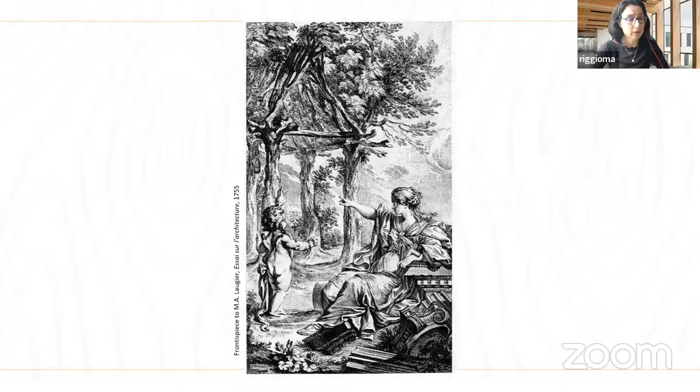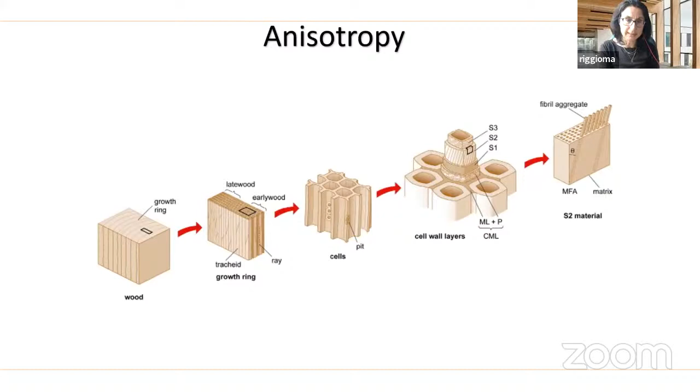Another intriguing, fascinating, and challenging aspect of wood is its relationship with water. I'm sure you have been exposed to this concept as well. We have water in the tree both within the cells as free water and within the cell walls as bound water. This bound water has a huge effect on how wood behaves, impacting its mechanical properties, all physical properties, and also its dimensions.

Wood always absorbs and desorbs moisture from the surrounding environment, and this implies changes in its dimensions. These changes are different in the transversal direction, because the cell walls swell, and this movement is propagated along the transversal direction, while it is much more stable along the grain. Keep these things in mind when I describe some of the construction systems.

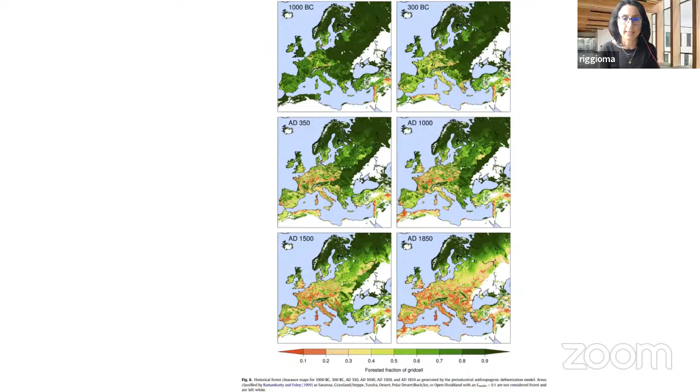First, some historical background, focusing on Western culture, though we have an incredibly rich culture of building with wood in other parts of the world too. In countries where the land was largely covered with coniferous forest, it was logical to use this plentiful material for building houses in the simplest way, with massive wood walls providing good insulation. This led to the development of log houses or blockbau houses, a technology using logs stacked in walls intersected at angles to make sturdy construction with good thermal properties.

On the other hand, in areas with a climate favoring deciduous hardwood trees such as oak, different technologies took place based on timber framing. Here, elements are connected to make a frame, and other non-structural materials are used for the infill, closing these panels for the building envelope.

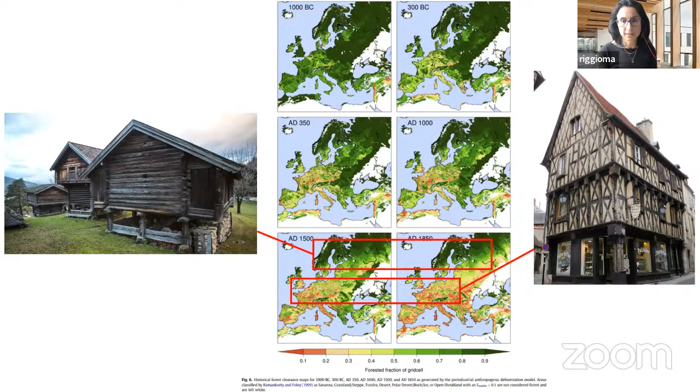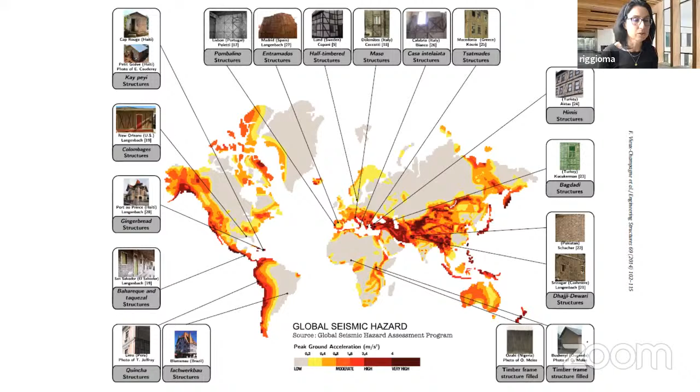This technology has different names in different parts of the world, but you can find it in many areas. What's interesting is mapping the evolution of timber framing systems in earthquake-prone areas. Both Peru and the West Coast of the US share the luck of being in the so-called Ring of Fire. I'm sure you know that a technique based on timber framing and other light materials was also common in the past in Peru, the so-called quincha system.

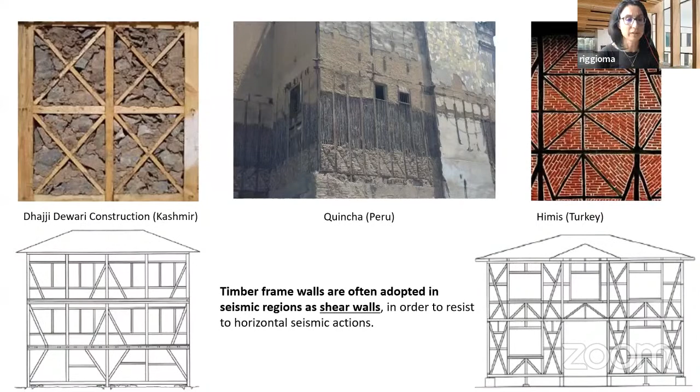Here are some examples of heavy timber frames in the past, dating back to the Opus Craticium from Roman times. One characteristic of these systems is the presence of cross bracing to create a stiffer system that can resist shear forces, basically horizontal forces. This type of construction, the so-called heavy timber frame, is also a common construction method today, particularly for commercial and industrial buildings in the US.

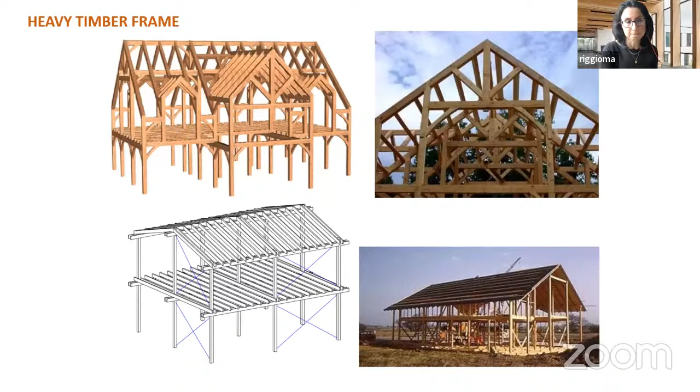The heavy timber system is often called post and beam. It uses large timbers for vertical columns and horizontal beams, connected nowadays with either wooden joinery or metal connectors. In the past, carpenters relied heavily on notched connections. This type of connection system transfers loads through friction and bearing. Keeping in mind the structure of wood, which is very strong along the grain, the load is transferred through this connection by compression, compressing the fibers, which allows for a very important behavior in case of an earthquake: dissipating energy. So basically, we have a ductile behavior in the connection systems.

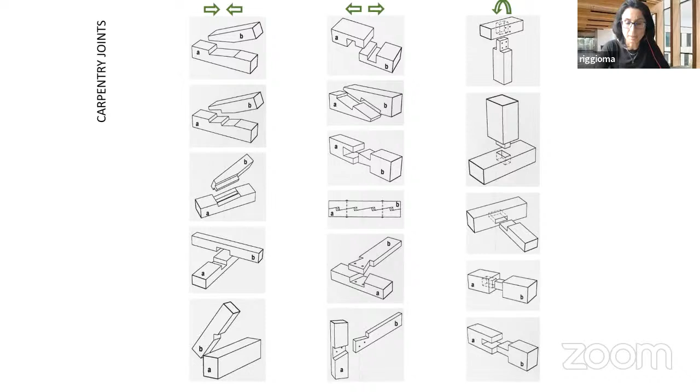Now, in case of an earthquake, we also have to make sure that when we have the reversal load, these systems do not disassemble. So we have to secure the carpentry joint somehow. But this system required a lot of skills. These were kind of unique buildings.

So quickly there was a development in North America, especially after the Industrial Revolution, with more efficient cutting of wood into timber members of a smaller cross section, which increased the efficiency and economy of building in timber. Also influential was the invention of the wire cut nail, which greatly increased the availability of nails at lower prices, and which basically replaced the blacksmith and forged iron nails.

So in the early mid 1800s, we have the development of the balloon frame, which originated in the United States around the Chicago area. And this is the St. Mary Church in Chicago, known as the first balloon frame building.

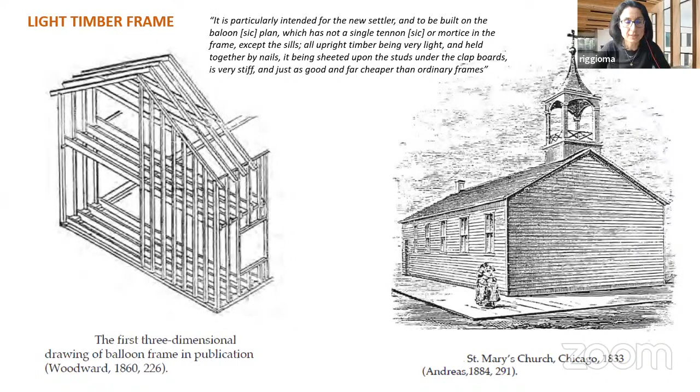So the characteristic of the balloon frame is the use of full height studs. So basically these vertical elements go for the entire height of a building, and then the floor joists are supported on a ledger. So basically, there is a continuity of the vertical system, and the wall extends two or more stories, and the floor is sunk on a ledger connected to the wall.

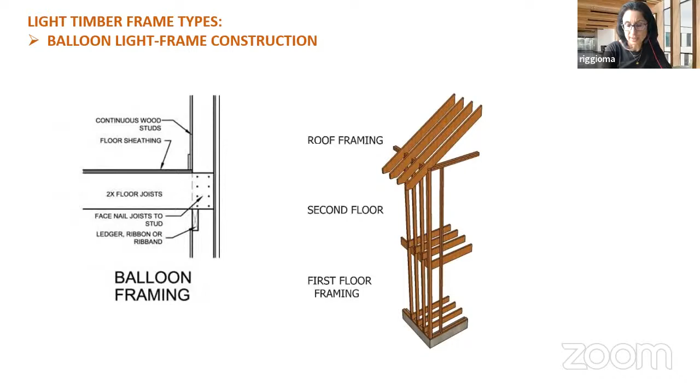This system is still used in the US, especially in industrial and retail applications, but it has its advantages and disadvantages. One of the advantages is that we have this continuity of the load-bearing vertical system. So if you, again, keep in mind the anisotropy of wood, we have a continuous load path along the fiber of the material where it is stronger. And also we have less impact in terms of dimensional changes due to moisture changes. And you will understand this better when you compare this system with the platform framing.

By contrast, the platform frame positions the floor platform between the first and the second floor vertical studs. So you see, we have the joists that are supported by the stud from the lower floor, and then the stud on the upper floor stands on the floor joist. So we have vertically oriented fibers, then horizontally oriented fibers, and then again vertical.

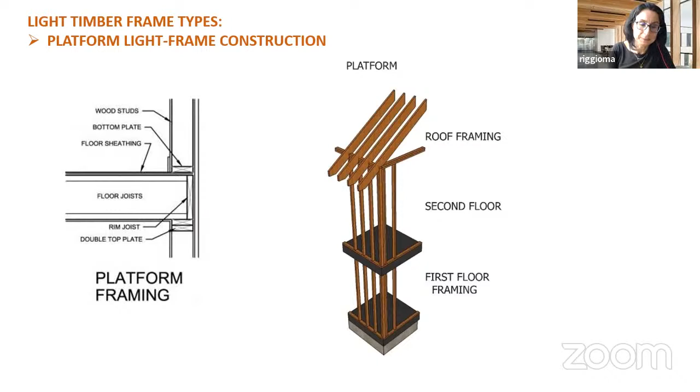So this area of the floor joist may deform in case of high loads, because we have crushing of the fibers. We may have high compression loads if we have multi-story buildings, and also swelling, so these dimension variations due to moisture absorption are higher in the transversal direction. This may also have an impact. These are one or two of the factors that may limit the number of stories in a light frame system. It's not the only factor. In fact, fire is also a huge limiting factor, but I'm not going to talk about this. I just want to show you all the variations.

So an approach to kind of combine the advantage of the platform frame, which is easy and fast erection. In fact, it's the most common way of building in the US for residential buildings nowadays. So a possibility is to still have studs on top of each other, so that we have this continuity of the load path along the fibers, and then have a top flange hanger that supports the joists of the floors.

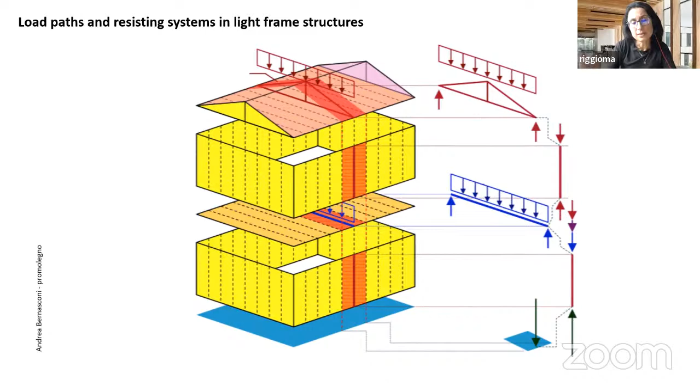So talking about load paths, we have the vertical loads that are transferred from the roof to the walls through the studs, and then in the platform system we have the joists in the floors that also transfer the floor loads to the studs of the wall below. So this is the gravity load path.

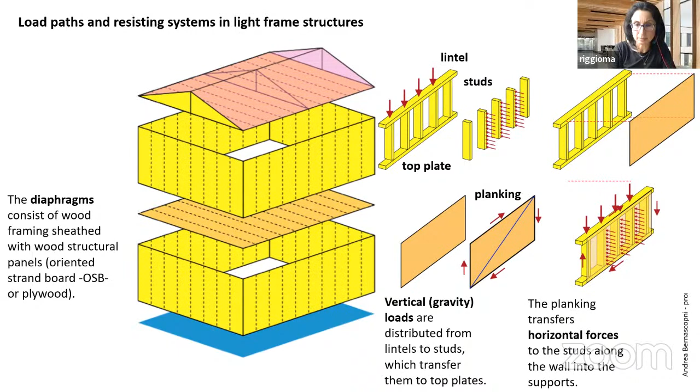But then, of course, we also have the horizontal forces. And the horizontal forces are transferred to the studs through planking, through planar or panelized systems. The planking transfers the horizontal forces along the wall into the supports, and the stud frame prevents the planking from deforming, from buckling. So this means that we have not just linear members in a light timber frame, but also panelized systems.

And actually, we have not just what we call here dimensional lumber, which is based on standardized dimensions of timber that is cut in so-called 2 by 4, 2 by 6 inches. But we have also different types of engineered wood products, which, especially for higher loads, allow us to optimize the material, to use less material, and have stronger elements. One of these common systems used in light timber frame, for instance, for highly loaded floors, are the I-joists.

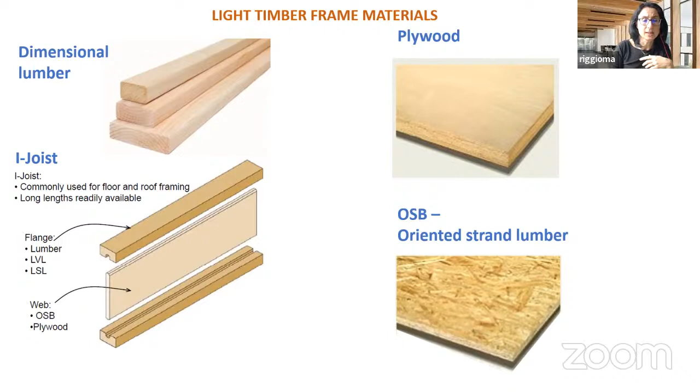In which we have the flanges that can be either solid wood or different types of engineered wood products, and then the webs in which we have a type of engineered wood panels. In the past, they were made of plywood. Nowadays, they're typically made with a type of strand lumber composite. And we have here these two materials that are also used for the planking. But I'm sure at this point you have some familiarity with these different types of products.

In this diagram, I want to show you how you can classify them. So basically, the basic concept of the different types of engineered wood products is that they are made by laminating wood. Wood that can be cut, that can be reduced into smaller elements, into boards or veneers or strands. And so depending on the width of this elemental component and the length of the fiber, we may have different types of engineered wood products with different structural capacities.

I've seen one of the questions regarding sustainability, why wood is more sustainable. I'd like to respond to this later on, but keep in mind this diagram. We have said that wood is strong in one direction, the direction of the fiber. So depending on how we layer these fibers in a wood composite, we will have a material that is stronger in one direction, that may have similar strength and stiffness in two directions if we cross-layer the fibers, or that has more of a plate behavior, maybe not so strong, but somewhat equivalent in all directions if we orient these fibers more randomly.

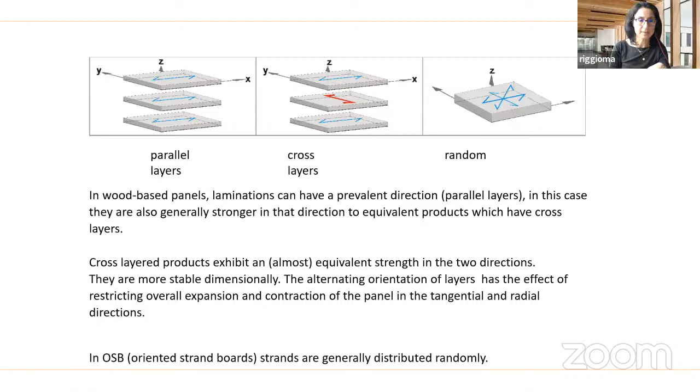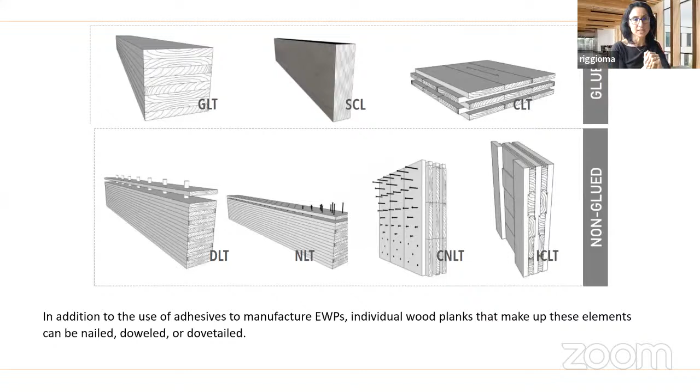And these laminations may be connected in different ways. The most common way is through glue, with adhesives, but we also have laminations that are connected with metal nails, with wooden dowels, or other types of systems. There are multiple advantages of using engineered wood products. One is that wood is a natural material, so it's variable, it's unpredictable. We may have different heterogeneities that affect its mechanical properties. So if we reduce the size of the material and spread these heterogeneities in the lamination, we have a much more uniform, more predictable material, something that engineers like more.

And then we can overcome the limitation of wood as it comes from the tree, with dimensions that are linked to the original dimension of the tree trunk. We can have longer elements by connecting the lamellas through so-called finger joints. We can stack these lamellas to make bigger cross-sections. We can cross-layer them so that we have more dimensional stability, because, as I said, there is an anisotropic behavior in the way wood swells and shrinks. And we can even shape it, like we can have curved elements. We can achieve a lot of new architectural shapes and forms, thanks to the versatility of these materials.

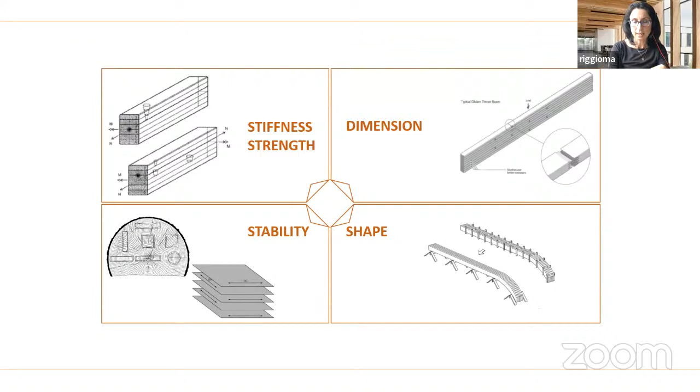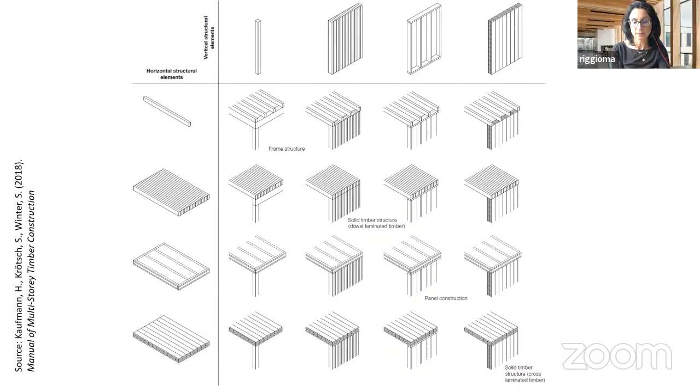And we have, at this point, a large portfolio of timber members and timber systems that we can use, both panelized and linear. We can combine them in horizontal systems, in floors, and we can use them in walls, and we can have a combination of linear and panelized systems of different types for walls and floors. So with the development of so-called mass timber buildings that use these engineered wood panels such as cross-laminated timber, as you have seen in the previous presentation, the first developments used these panels both for floors and for walls, both as a gravity load-bearing system and as a lateral force resisting system.

Now you can see some of the potential limitations of this system. Basically, you have to have a continuous load path, and therefore you have to have basically the same layout on all the floors. There are some ways to overcome this challenge, but these are still potential limitations. Another limitation is that you have to have enough material, also on the external walls, to have enough strength in the external load-bearing walls. Therefore, you don't have so much freedom, let's say, in how you place the window glazing and openings on the facade.

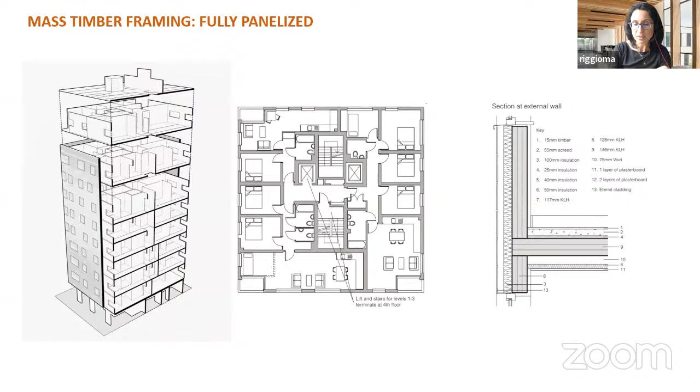There are also lots of advantages, of course, and this building, which was the first multi-story building made with CLT, was built at an incredibly high speed in a densely built and populated area in London with no disturbance, so in a very fast and efficient way. This system is also very interesting in seismic areas because it basically works as a box. So it's very rigid, very stiff, and both the walls and the floors can participate in transferring the horizontal forces.

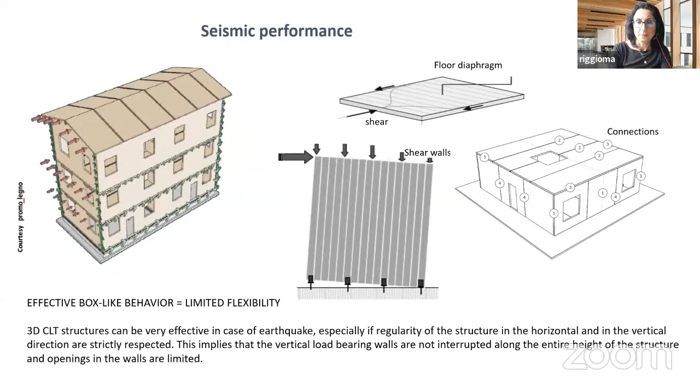But nowadays we see more and more the use of a combination of mass timber panels with post and beam systems. Post and beams that can be made with glue laminated timber or other types of linear engineered wood products, and panel floors that can be CLT, dowel laminated timber, or other technologies, mass ply panels, which have been developed here

in Oregon. So really the tendency here is to have hybrid systems in which we have a mix of wood with other materials, or different engineered wood products used for different structural systems. And I would say this is, in my opinion, the future. We build with wood, taking advantage of all the properties, or the qualities, that different materials can offer.

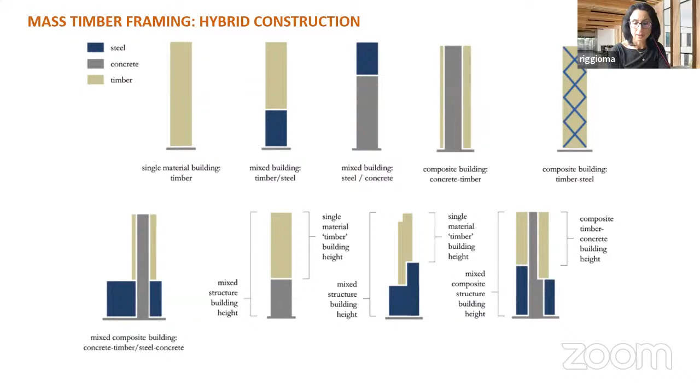And these are some examples of hybrid mass timber buildings. Brock Commons is an 18-story student residence at the University of British Columbia in Canada. At the time it was built, it was the tallest mass timber structure in the world. And you see that basically there are two main structural systems: a concrete podium and then two reinforced concrete cores where all the vertical distribution elements are located, so elevators and stairs.

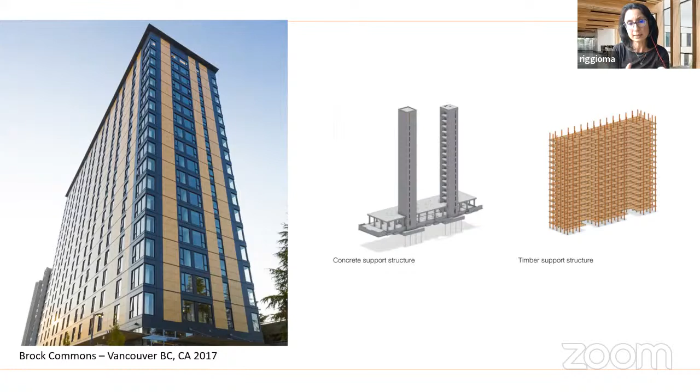And then we have the timber support structure with post and beam made with glulam and other types of engineered wood products in the lowest part where they are most loaded, so-called parallel strand lumber, and then CLT floors, cross-laminated timber for the floors.

And this is the gold building, one of the new signature mass timber buildings in the Adidas Portland campus. And again, it utilized a hybrid structural system with precast concrete columns and girders and glulam beams and cross-laminated panels for the floors.

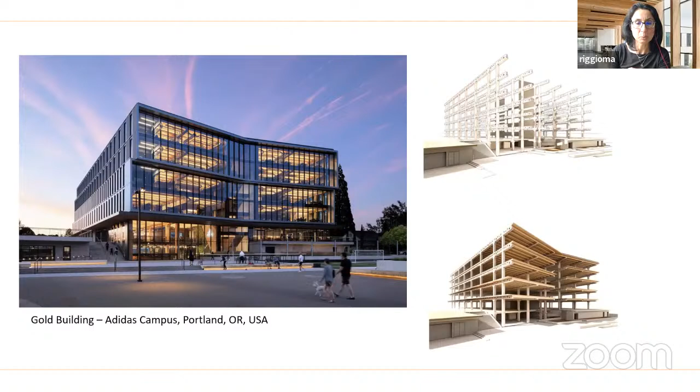So this is another picture of the Adidas building, and you may notice another interesting aspect of using this system, which is prefabrication. I'm sure my colleague Michael will talk more about this aspect after my presentation, but this is a huge advantage of building with wood and also in hybrid systems, the possibility to have a fast erection and reduced or no construction waste, high precision, minimum tolerances, and so on and so forth.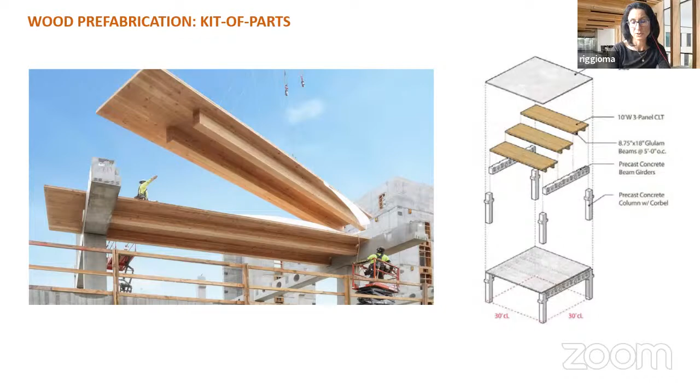So in the wood construction industry, there is an increasing interest in developing kit of parts. So basically developing construction systems that are based on the use of a few standardized elements that are used throughout the building and maybe reused in different combinations in other projects.

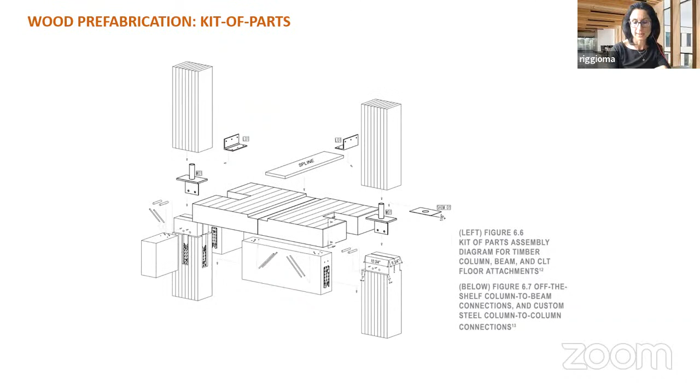So while traditional light wood framing is, I would say, a pretty much low technology construction system with all the studs and plates that are erected on site, there are ways to expedite the construction or even push the construction to the plant, and so basically have an off-site construction of the wall panels or of the walls and the floors or of the whole system.

Wood by itself allows for a certain level of prefabrication, especially when we nowadays build with heavy timber framing or mass timber construction. And we can have different ranges of prefabrication from linear, panelized, or volumetric. So in linear prefabrication, for instance, we may have connections already incorporated in the elements. In the panelized, we may have different levels of systems integration, including the envelope, for instance. And then in the volumetric, we can build from room modules to basically whole houses.

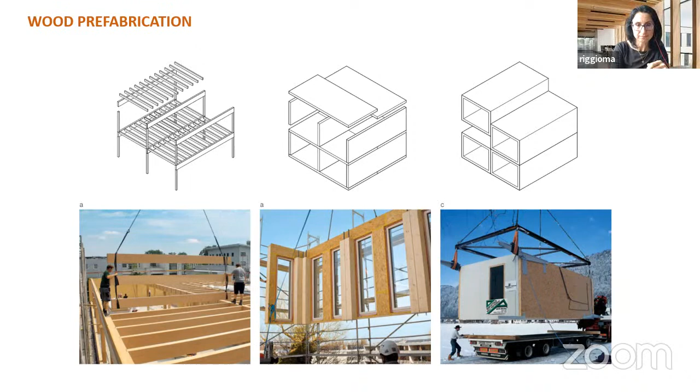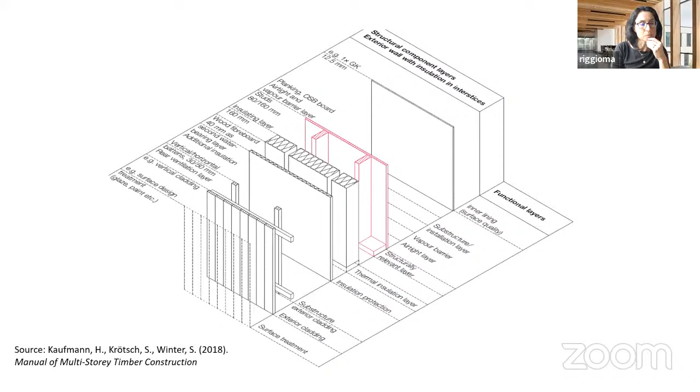These are examples of integration of the building envelope control layers in a light frame wall. So you see that all the functions of the building enclosure are made through a layered system in which we have the studs and the sheathing that plays basically the structural role. The sheathing can also have a role as an airtight layer to avoid airflows. And then we have the thermal insulation layer between the studs, protection of the insulation layer, and then a rain screen.

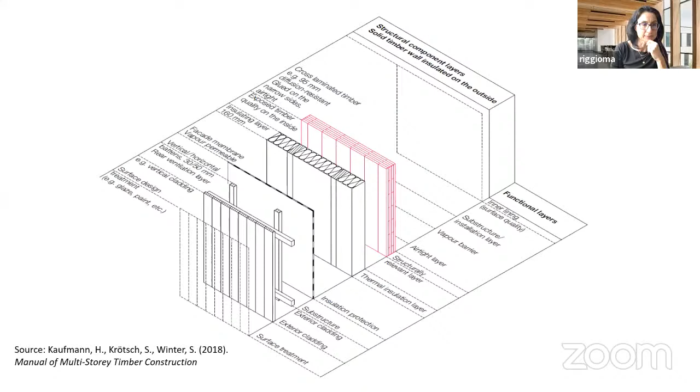In a mass timber external wall, depending on the technology of the mass timber panel, this may have different roles, including a certain level of air barrier, and also participate in the thermal envelope, because of course wood is a good thermal insulator. So we can reduce the thickness of the thermal insulation thanks to the use of mass timber panels. And in some cases, there are examples of integration of these systems of the building enclosure in prefabricated systems.

This is an example of a project that was built in Austria in the Alps in 2009, which uses modular CLT to quickly assemble on site rooms for the hotel. So this is in the Alps with heavy snow loads and early snowfalls. So there is a very limited time span where it's possible to build. And therefore, they wanted to expedite the process. They built all the modules in the plant, delivered and stacked them quickly.

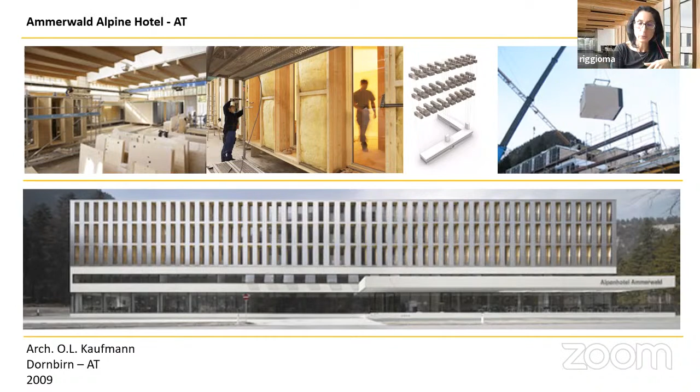And so you see that this type of concept can be very, very appropriate for buildings where we have a repetition of the same type of spatial layout. That can be hotels, dormitories, student residences, and so on and so forth.

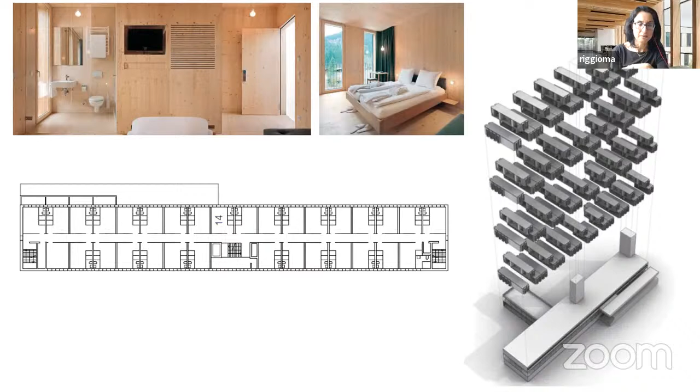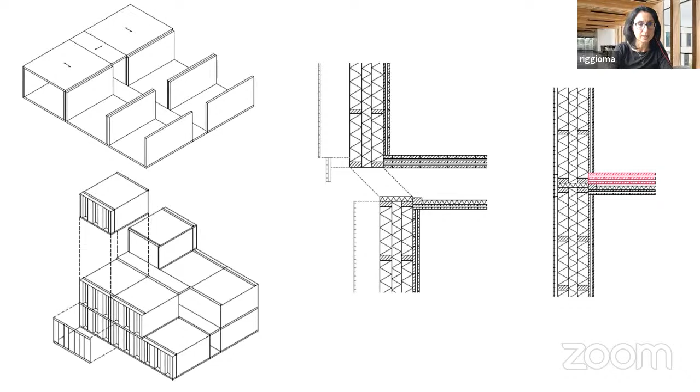You see here the two modules that are stacked on top of each other. In this case, they are almost three-dimensional. One side was open to then attach the facade that was also prefabricated, but was a separate system. And you have the double layers of CLTs.

The double layers of CLTs also improve the acoustic insulation between floors. So what we see is really a transition from craftsmanship, in the old-fashioned heavy timber framing, to mass production with the evolution of the light framing system.

Framing systems evolved to mass customization. Nowadays we can build with wood in a very efficient way, but also have unique projects to a certain extent. So we have almost all the time unique projects, and we are also now trying to investigate how we can have some form of standardization within this mass customization.

Connections play an important role nowadays also, not only on the structural behavior of these systems, but also in the expressive, architectural expression of these structures.

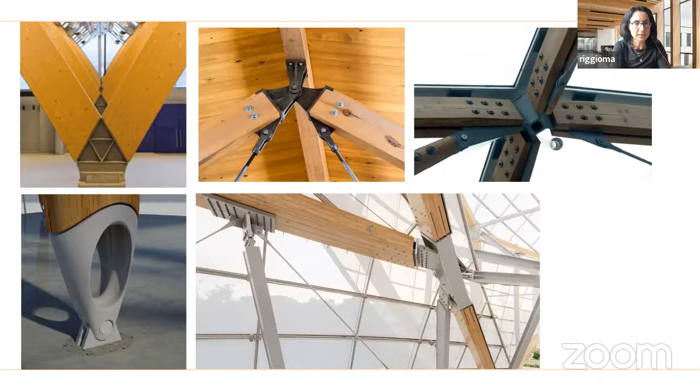Nowadays, with the development of digital fabrication, the use of computer controlled, numerically controlled machines, we can carve wood to create notch connections with a complexity that is even bigger than what was possible in the past with traditional heavy timber framing.

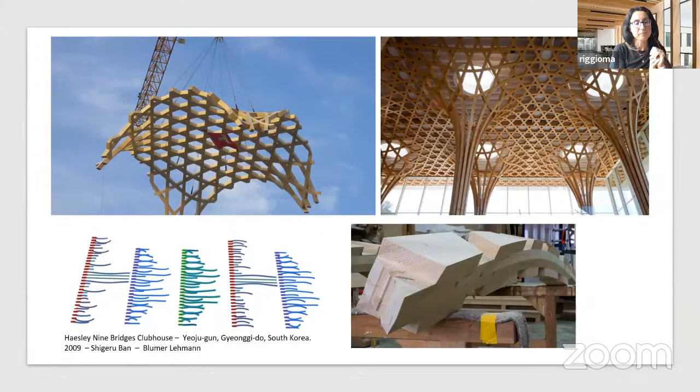So we can shape wood, we can bend it, we can curve it, we can create curved shapes, and we can notch them with CNC machines. And basically, we can have unique pieces, as in this beautiful grid shell by Shigeru Ban, still in a very efficient way of fabricating.

So I think wood is really, again, a fascinating, complex material, but really brings a lot of innovation and a lot of opportunities in terms of creativeness. And of course, we believe it will also help us create a more sustainable built environment.

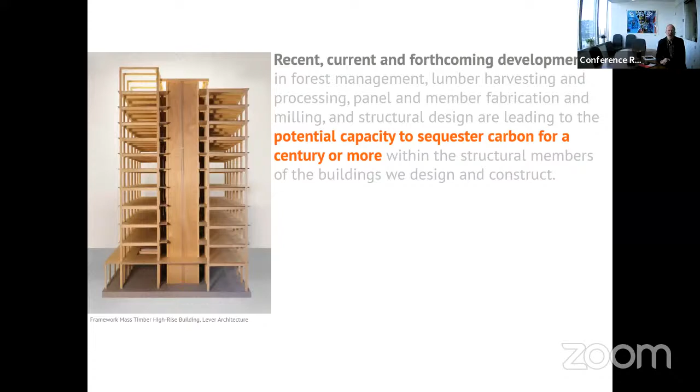That carbon held there will allow us the time necessary to develop different transportation systems and other things, energy production and such. What's intriguing is that while we're looking for these other solutions for transportation and energy production and manufacturing processes that use less carbon, we have this method that's working very well to immediately begin sequestering carbon that's been taken up over the past 30 to 40 years and continues to be absorbed.

So the thing that will be important in order for mass timber to be utilized broadly would be for the systems we're talking about to be widely accepted. And clearly the most important factor there would be to convince code authorities and authorities having jurisdiction over standards and requirements that these systems are safe, that they're appropriate, that they withstand fire, withstand earthquakes.

So one of the primary things I'll be addressing will be the prevalence of standards and requirements for the materials, the glues, the species of wood, etc.

The projects we've already been utilizing mass timber on are broad. As I mentioned, we're not only working on many different types of projects across various structural systems, we've utilized mass timber in over 80 projects we've been involved with so far.

And these are for all types of buildings - all the ones shown here use mass timber. In some cases, it's quite visible coming outside the building envelope and supporting the structure. In most cases, however, the structure is within the building envelope and protected from the weather.

This is clearly a concern in the Pacific Northwest because it's quite wet here a lot of the year. But even in South Florida where we work, we obviously have a lot of moisture as well as heat and termites and other insects. So keeping the wood inside the building envelope is the primary strategy to preserve it.

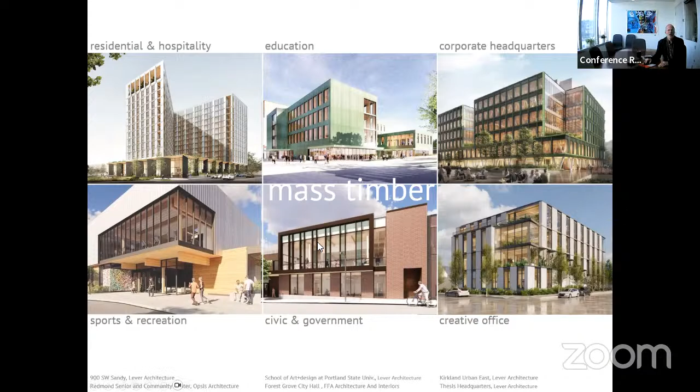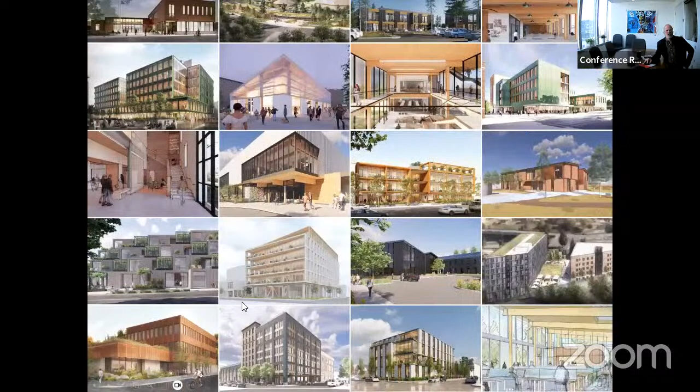So these projects cover all aspects of construction and project types that we've been working on.

The overview I'm going to give you of mass timber is going to talk about the types of mass timber panels, the standards we use to regulate those, the various species and grades and layups we use, the various appearance classifications we call for, fabrication and tolerance requirements. We'll speak about adhesives, fasteners, and connectors. We'll talk about delegated design and what that means. We'll speak about the coordination and shop drawing process between bidders and contractors and the architect. We'll speak about method statements, sealers and finishes to protect the wood, and about fire-rated connections.

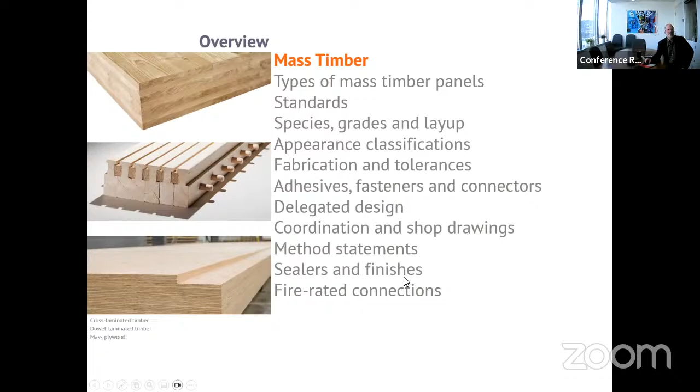First of all, I want to explore the types of mass timber. We have cross-laminated timber, dowel laminated, nail laminated, glued laminated, and structural composite, sometimes referred to as mass plywood.

The standards we see are broad ones that cover mass timber in general, as well as very focused standards for everything from adhesive to fasteners and grades of wood.

The use of this material has increased in the North American market since about 2008-2009, as we saw projects such as the one in Vancouver and others set the stage for this development. Since that time, we've had multiple generations of documents that support that.

One of the primary ones is the ANSI 117, updated every 2 to 3 years, the most recent being 2020. We also have a mass timber design manual produced by the Wood Products Council that is more user-friendly and a good introduction to the standards. There's also the National Design Specifications for the United States by the American Wood Council, and a similar parallel document in Canada, the CSA O86, which covers engineering design in wood. I can make all of these available in a zip file with as many as I was able to grab free online.

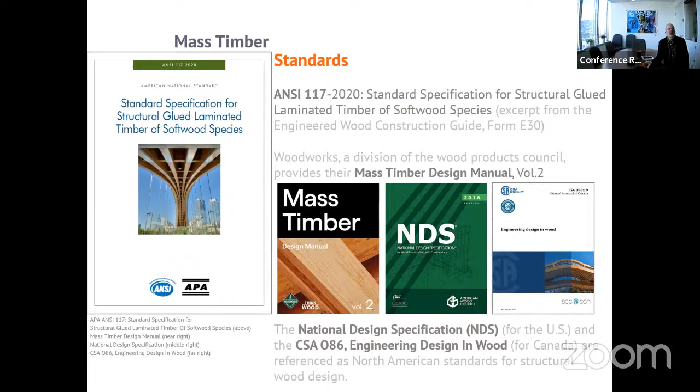Within the mass timber types, the first one I talked about was cross-laminated timber. This is a product that initiated its existence in northern Italy and southern Austria, laying up approximately 50 millimeter by 150 millimeter pieces of wood into alternating direction lamellas.

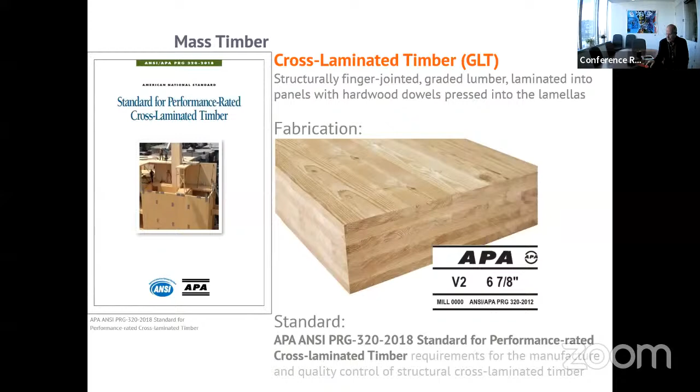Cross-laminated timber can be used, and has been used, primarily as a horizontal force-resisting element and as a floor panel, but increasingly is being used as a vertical element for lateral shear as well as conducting gravity forces down to the foundation.

There's a very good standard that the state of Oregon has developed, the Statewide Alternate Method, which provides good guidance for seismic force resistance in lateral forces. It's definitely important that certain state bodies are developing their own standards, often because of the benefit to that state's forests and forestry industry.

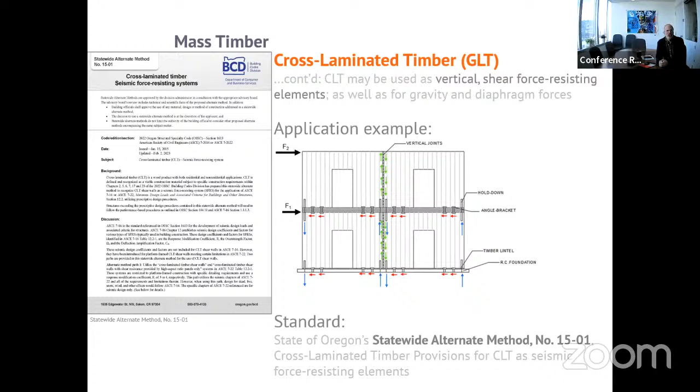Other states as well, Arkansas, the province of British Columbia, and others have developed standards. Eventually these will probably be turned into national standards, but it was important that states develop these on their own to protect their own forestry markets. Similarly, I expect that provinces or individual countries within South America will develop standards, and those will become more regional or international standards over time.

The second type of product I'd like to talk about are dowel laminated timbers. These are completely wood systems, which can be done with adhesive or without. They consist primarily of a softwood vertically oriented member that has a hardwood dowel driven through pre-drilled holes. These are usually done as built-up panels about 70 centimeters to maybe 2 or 3 meters in width, and perhaps 5 to 10 meters in length.

They're delivered to the project site and installed compositely across the surface as a horizontal deck. The image shown here is actually upside down from the final installation. This one's shown with a groove routed into the bottom of each member before they're assembled, which provides a certain aesthetic quality. It prevents the appearance of cracking or gaps opening between individual members, and provides a bit of acoustic improvement as well. Normally this surface would be the visible surface facing downward.

There is a standard for this, recognized in ICC evaluation reports, such as one the manufacturer Structurecraft developed, the ESR 4069. So like the states that develop their own standards to promote their own industry, sometimes when a standard is lacking, an industry participant like a manufacturer may promote themselves by financing a study that then becomes a standard over time.

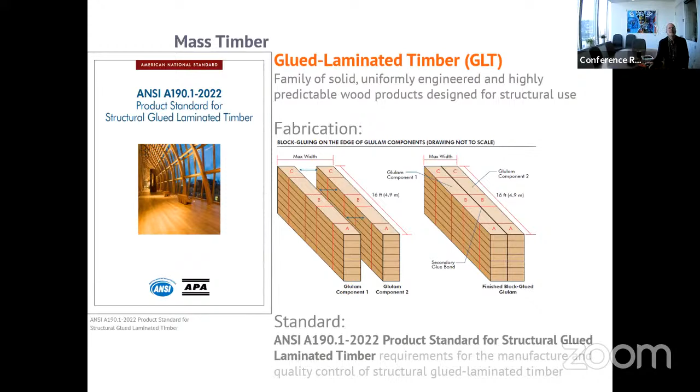The intriguing thing about glue laminated timber is the ability to curve the members and produce quite dramatic structural systems that can be exposed to view. Obviously, a quite extreme example here, creating a very interesting building structure.

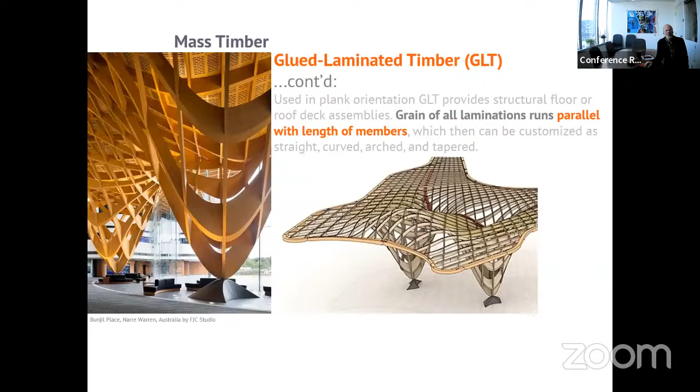Another mass timber system is structural composite lumber. This exists in a variety of types. Maria Paola had a very good slide showing the variety of ways a tree can be pulled apart and its individual pieces used. We've gotten quite good at peeling logs, peeling off a thin layer of a rotating log to create the veneers used for LVL. Those are then built up into panels we sometimes refer to as mass plywood panels.

The wood can be chopped into pieces that are used as parallel strands. The definition for a parallel strand is that the ratio of width to length of the strand is about 1 to 300. Laminated strand lumber is a similar but smaller chopped element, with a ratio of about 1 to 150. And oriented strand lumber has a ratio of 1 to 75.

All of these can be married together, first laminated as fairly thin panels, and then those panels brought together to produce thicker sections for horizontal floor and roof plates, which could be in the range of 20 to 40 centimeters even. The standard for that is the APA structural composite lumber selection specification.

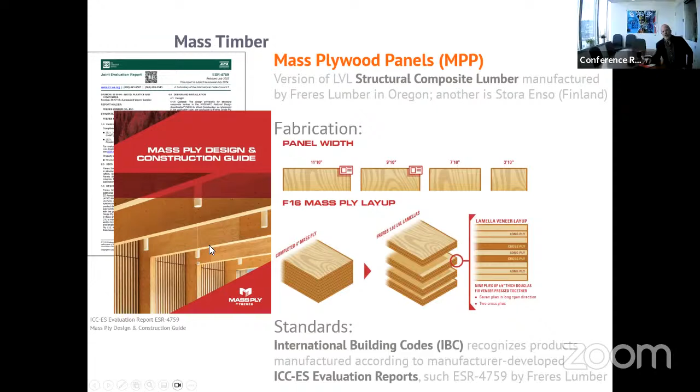These are then built up as multiple thinner, about 2 to 2.5 centimeter thick panels, married together to produce something that could be in the range of 20 to 40 centimeters. These can be used, as shown in the image here, both horizontally and vertically as framing members, as well as horizontal panels for roofs and floors.

There was a good question earlier about adhesives. Adhesives are important not only for the structural capacity of the wood, but they need to maintain their strength during the high moisture periods of the wood's life. When panels are originally adhered together, the adhesive needs to continue to perform as moisture leaves the wood during drying. Then the adhesive needs to maintain its strength even when that panel or structural member may be exposed to moisture in the field.

Additionally, the adhesive has to remain strong in the event of high temperature during a fire event. Also, some of our architects want the adhesives to be clear and not easily visible, and I'll talk about that a little later.

The standard available for adhesives is ANSI 405, the Standard for Adhesives Used in Structural Glue Laminated Timber. Clearly that's aimed originally at structural glue laminated timber; however, we are using that same standard for CLT and other mass timber products. There are a number of other standards within the ASTM standards that regulate moisture and durability of bond, and those are listed here, which I'll provide.

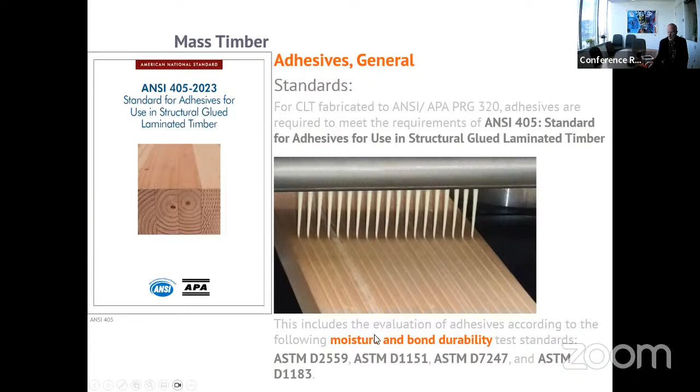There are some additional adhesive standards that we've used over time, and this is because, as with any new construction material, standards have been developed in one location that may not be developed in the place where the product's being used. So working with local authorities at the beginning of our use of mass timber, we received some allowances to use

European standards, such as Deutsche Industrial Norms or European norms. These grades of services were able to be incorporated into the National Design Specification first, and then we've developed North American standards with ASTM. The exterior exposure standard, if the glue lam or CLT or other mass timber is going to be outside the building envelope, is ASTM D 2559.

Additionally, we have some appearance requirements. We typically require that the glue be a white, clear glue instead of the dark brown glue that's sometimes used. The dark brown glue can be seen in the image on the left here, where the line between the lamellas is very visible because of the glue. That's less apparent in the image on the right due to the use of clear glue. The use of the clear glue allows the member to appear more monolithic.

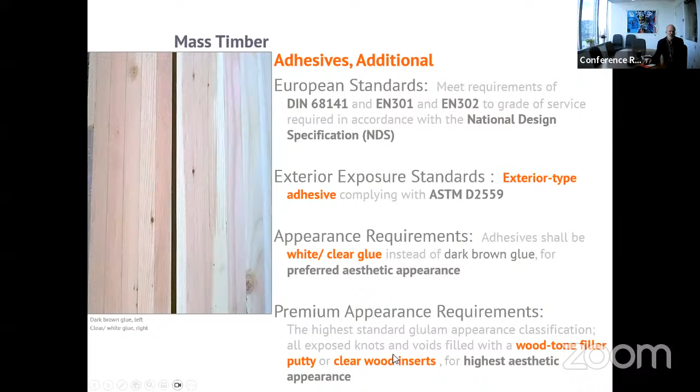There was a question earlier with regard to the protection of mass timber from fire. And as Maria Paula noted, the method that was used in the beginning of mass timber, both in the Tyrol region, in Scandinavia and Benelux, as well as British Columbia, was to simply encapsulate the wood framing and decks with gypsum board materials, multiple layers.

This was done because there already was a developed standard for how to protect wood framing from fire using those same gypsum board materials. However, one thing that was well understood with regard to mass timber, and this has to do with solid lumber timber, quite large members that were used, from all throughout the 18 and 1900s, were

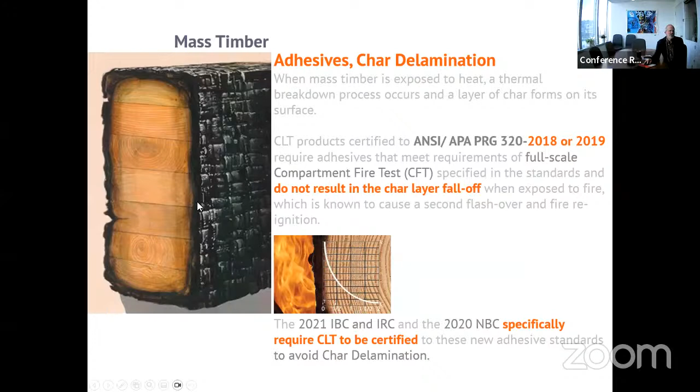Also important, obviously, are the fasteners and connectors that we use. We have a very good standard now for the dowel type threaded fasteners that we're using. These fasteners used throughout the process, both to connect the panels to the structural members and to connect the various connector plates to the members, all fall within this standard. The connectors I'm referring to here are essentially steel plates and buckets and brackets that are usually custom fabricated for each project, and they use standard ASTM steel standards and galvanizing standards here.

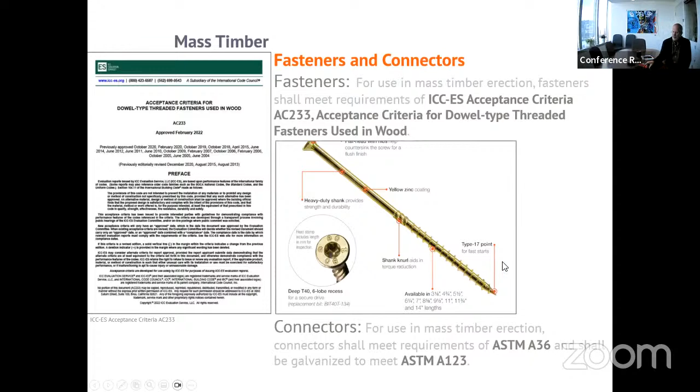I spoke earlier, or said I would talk about delegated design. Delegated design is a standard that we use in the United States, especially for new structural systems where the project structural engineers may not be familiar with how to design with a new product. In this case, the manufacturer would provide the engineering for the members, as they're going to be more familiar with that than the project structural engineers. This is something that over time will go away as structural engineers become as familiar with mass timber as they are with steel and concrete.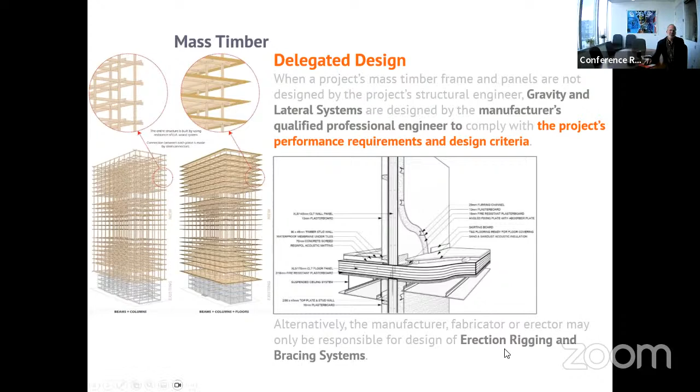I don't expect to see so much full system engineering as we've been calling for in the past 10 years or so. However, one aspect of the products that will continue to be delegated design is the erection, rigging, and bracing. So that means how, when the product is brought to the job site, is it lifted into place, attached both temporarily and permanently, and how is it braced temporarily until the building structure is complete.

Also important in the relationship between the manufacturers and the engineers and architects are the shop drawings. In this case, the manufacturer or fabricator is responsible to provide computer-generated designs for each member of the building, both the horizontal plate, like we see engineered here, or the vertical and horizontal members, supporting members, including potentially the interface with steel structure that may be used for seismic or other lateral force control. The shop drawings are produced by a professional engineer employed by the mass timber manufacturer, and they are signed and sealed by that manufacturer's engineer.

The shop drawings can be produced in a variety of levels of detail. Usually at the start of the project, they're in the LOD 100 to 200 level. This is an international standard that determines the amount of detail involved. In this case, this image is showing a precast concrete column where you see just a standard understanding of vertical force, beginning to understand how the transfer of other vertical forces into that vertical member, the beginning of understanding at LOD 350 of additional composite materials in the case of the reinforcing bars in this concrete column, and then finally the full reinforcing in concrete at an LOD 400.

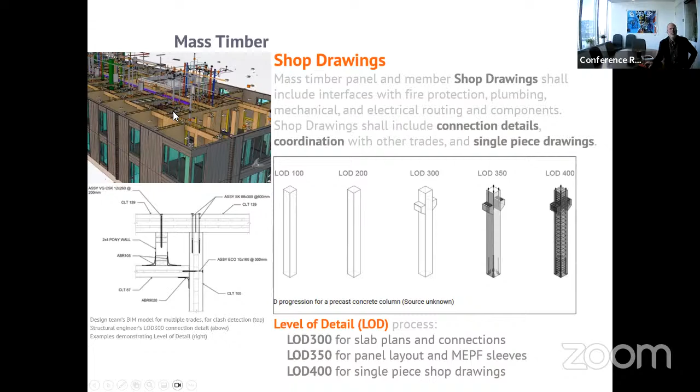Coordination drawings are, in essence, what I just spoke about. This would be drawings that the manufacturer of the mass timber elements, the general contractor, and possibly working with the design teams, architects and engineers, to once again generate a coordination model or drawing that brings in all the elements of the building, but even begins to anticipate loading of a truck so that when it arrives on site, the members that are on top are the first ones that need to be erected, and then proceeding through the load.

It's quite common that part of the coordination drawing sets are the loading diagrams showing how 50 or 60 loads of mass timber materials are loaded at a factory or a fabricator, brought to the job site on a regular basis, and then unloaded and taken away.

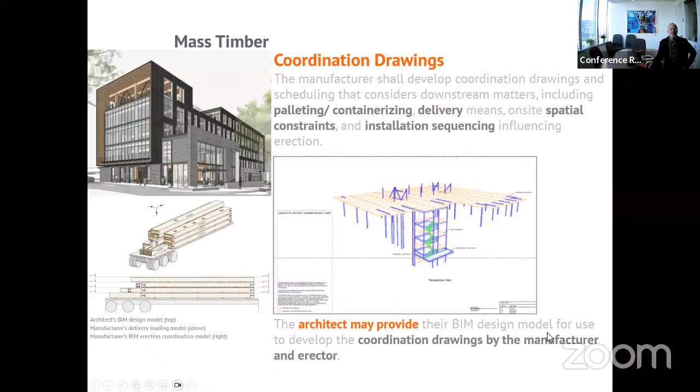Method statements are something we include in the specifications, which lay out the responsibility and requirements for bracing the structure during its erection, such as the example here where we have cross braces that are temporarily attached. We also talk about how those can be attached, because we like the appearance of the wood and we want to leave the wood exposed, and we want the fasteners that are used not to damage that wood.

A rigging plan also needs to be provided by the contractor, which shows how they're going to attach and lift and place these members into position during the construction.

One thing I went over a little bit too quickly during my discussion about fire protection: the reason that we were interested in North America to do the fire testing rather than simply wrapping the members in gypsum board was that the appearance of the wood is a pleasant thing that we'd like to take advantage of. Being able to see the underside of the wood deck, the columns and beams, is an attractive aspect that creates a warm and inviting environment.

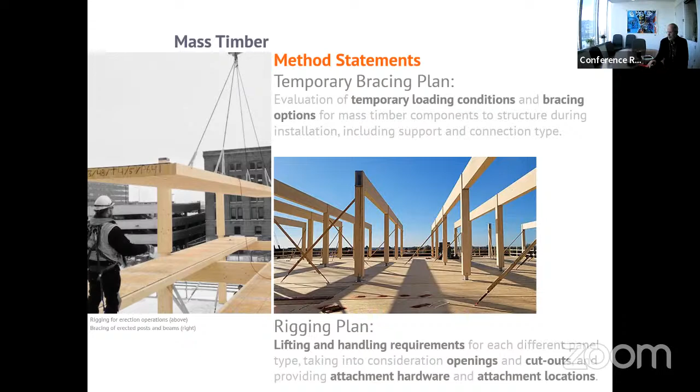Clearly, this is something that's kind of moving to other parts of the world as well. Equally in Europe and Australia, New Zealand, South Africa, they are utilizing their own fire testing to prove that the wood can exist on its own without additional gypsum layers or other types of fireproofing coatings or treatments, so that the wood can be experienced as an attractive element in the building. Obviously, that also saves cost. We don't have to wrap all these materials with gypsum board or other finishes, which reduces cost and carbon impact and everything else.

Included in the method statements, jumping back to that issue, is a weather and moisture protection plan. Basically, we require the contractor to let us know how they are going to keep the building dry, so that during construction we don't have moisture on the deck that leaks through the joints and comes down below, bringing with it staining and rust and dirt.

This is always a problem if you start to marry steel with wood. The steel on the job site is typically not coated and begins to rust almost immediately and begins to stain the materials elsewhere in the building. Since this ceiling won't be covered by gypsum board or an acoustic ceiling system, the contractor had to go back and individually sand and clean all of these members to get them to appear appropriate.

There are some standards with regard to CLT for the grades and species of wood. I talked earlier about the wide variety of species available. These are all North American species originally, but I know that many of them are planted in other parts of the world, or other products such as radiata pine may perform quite similarly to southern yellow pine or Doug fir larch. So these are the variety of species that we see.

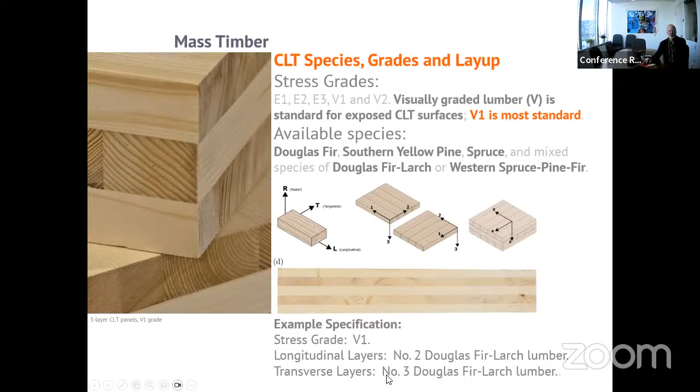There are some appearance classifications. We speak of architectural appearance, which is obviously where we're exposing and we want a nice look to the wood. In this case, the face layer is free of knots and other deformities. Again, that only applies to the face layer. The concealed layers could be a lower quality as long as they meet the engineering standard necessary.

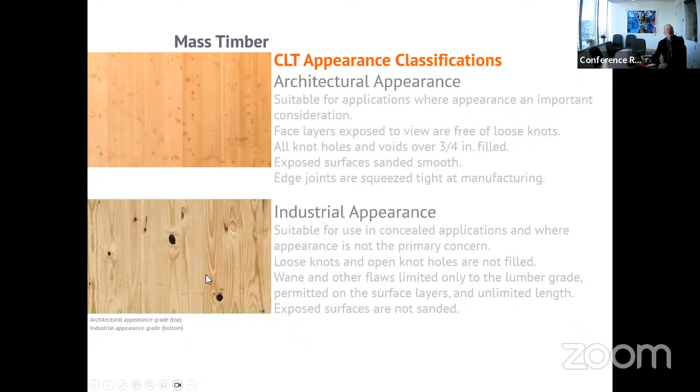All knots and holes would be filled, all exposed surfaces are sanded smooth, and the edge joints are tight during the manufacturing. What that means is that the presses they use to squeeze the panels vertically also have a sideward pressure to push the panels together and keep the members aligned. An industrial appearance obviously would be an allowance for knots and other deformities. Scratches and damage to the wood may be acceptable to a certain degree.

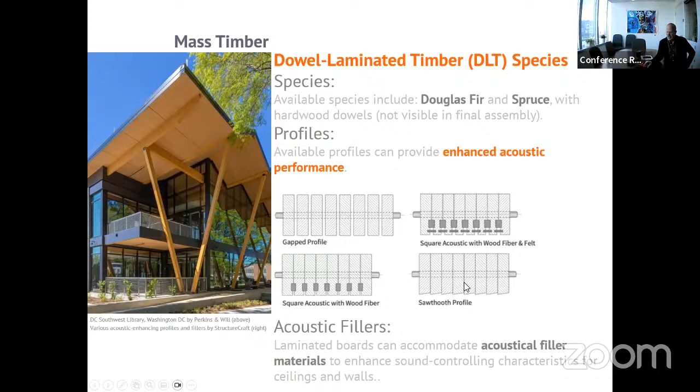Dowel laminated timber has similar standards. We have species of Doug fir and spruce. The profiles, as I mentioned earlier, can be altered in order to create various acoustic performance. This acoustic performance isn't substantially improved. It's something like a 0.80 STC for those who understand that. But it is better than the raw wood. We've seen this used in libraries and other spaces that don't need a very high acoustic performance, but some improvement is desired.

Nail laminated timber similarly is available in all of the species that we're familiar with. And in fact, here's a good example of a nail laminated timber deck. What's intriguing about this product, because of the individual layers screwed or nailed together, is that they're able to follow a curve, such as in this transit station in Vancouver, BC. For glue laminated timber, we see the same types of species as we saw for CLT.

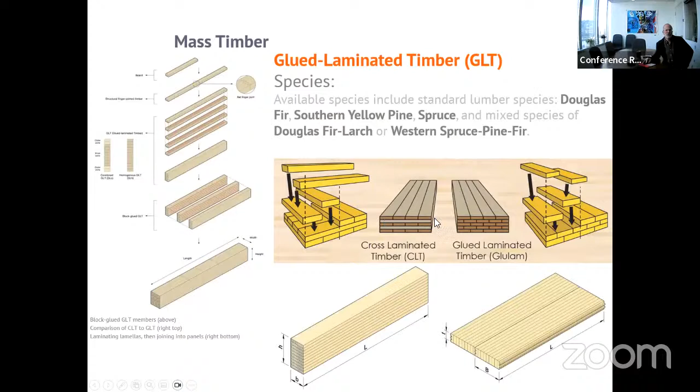The difference between cross laminated and standard glue laminated is a continuous longitudinal orientation for glue laminated, and obviously changing the orientation in cross laminated. The structural composite lumber would be like the mass plywood.

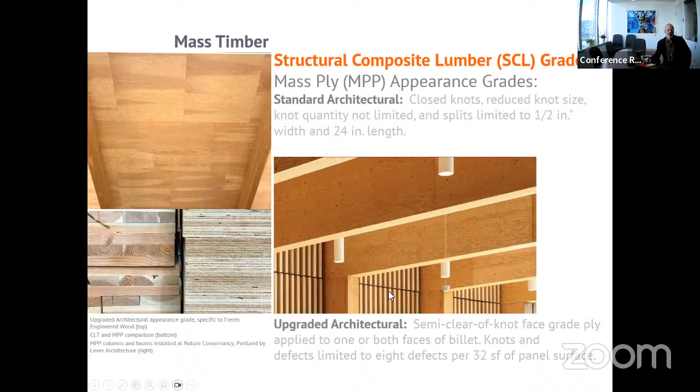Fabrication tolerances are very important. The fabrication process for milling the wood and basically creating the ends of the members, the particular cuts across the members, and the holes that are drilled are done with a very high precision computer numerically controlled, or a CNC machine. The tolerance is in the range of 1.5 millimeters. So the wood tends to be very high tolerance compared to other fabrication and structural systems.

More specifically, the thickness is within basically 2% of panel thickness, or about 1.5 millimeters. The width of the panel, about 3 millimeters. The length within 6 millimeters. The squareness, again, within 3 millimeters. And the straightness, again, within 1.5 millimeters. These are our standards for mass timber.

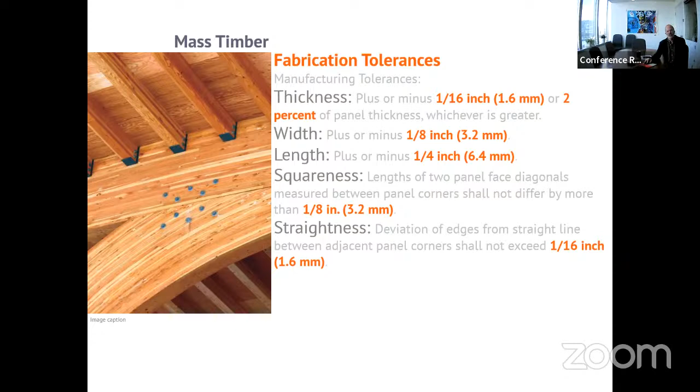The difficulty is when we meet a piece of steel or concrete in the building. The steel standard is more in the range of about 6 millimeters, and concrete as much as 12 to 25 millimeters. So you can imagine when steel comes against concrete, we need to require that the steel or the concrete have a tighter than normal tolerance to ensure that the members come together, or slotted systems or other means of adjusting for inconsistency in the field have to be incorporated.

Sealers and finishes are important both for the protection of the wood during the construction and its appearance following construction. As Maria Paola noted, in the factory, they can apply either a liquid coating or a self-adhered membrane. We often request that that be installed in the factory before the panels arrive on site. And this is so that once they're on the site, we don't have as much moisture moving into and through the panels and staining the materials down below, but also simply in our environment here with so much moisture, to avoid the excessive moisture and potential for mold or other problems inside the building later.

There are both interior and exterior finishes, some of which can be UV resistive or last a long time when exposed to rain and the weather.

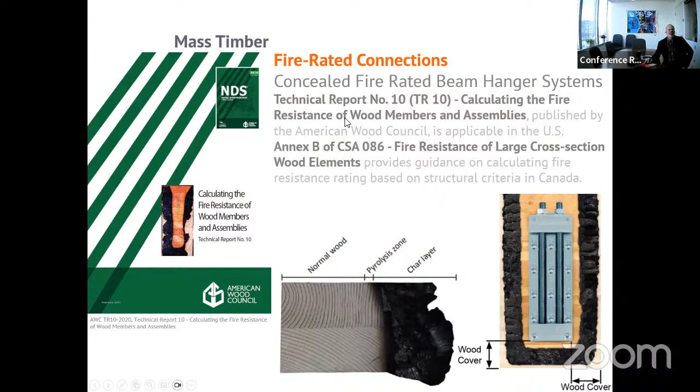The standards that we're using are the Technical Report No. 10 for calculating fire resistance. And then for Canada, there's the Annex B of the CSA fire resistance for wood elements. Both of these take care of the connectors as well.

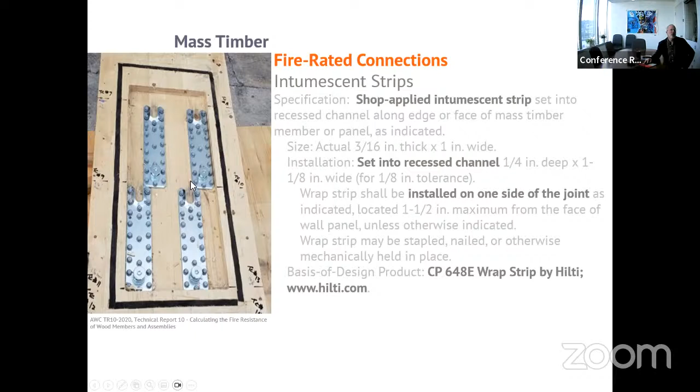So that's the full presentation with regard to how the various standards and requirements that we specify come into play. We spoke about grades of materials, the types of various mass timber systems, the adhesives that are involved, the finishes we use, the connectors and fasteners.